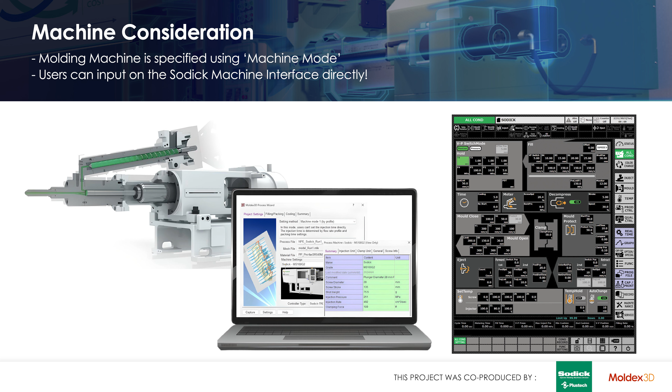Moldex 3D's machine mode allows for selection of a Sodick V-line two-stage plunger, and the machine interface allows for input of the machine parameters directly into the simulation. This makes the correlation from simulation to reality a breeze and plays an important role in developing a digital twin for smart manufacturing.

The balance of flow through the part geometry is important, but for a multi-cavity system like this one, the similarity from cavity to cavity is even more important to ensure every part coming out of the mold is up to quality standards and to decrease plastic waste.

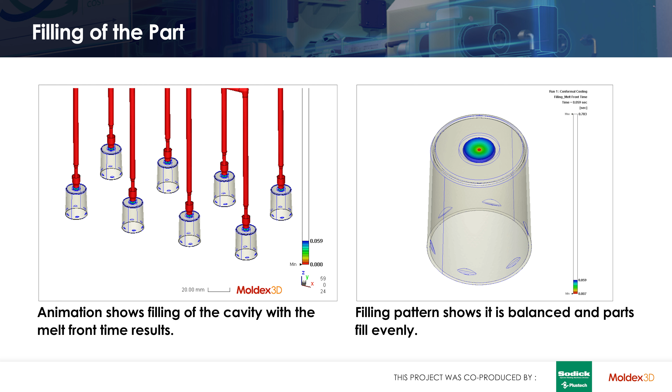To visualize the root cause of potential cavity-to-cavity imbalance, Moldex 3D's true 3D solid mesh can capture any thermal imbalance in the runner created by the flow of plastic. This can be done for both hot manifold systems as well as complex cold runner layouts.

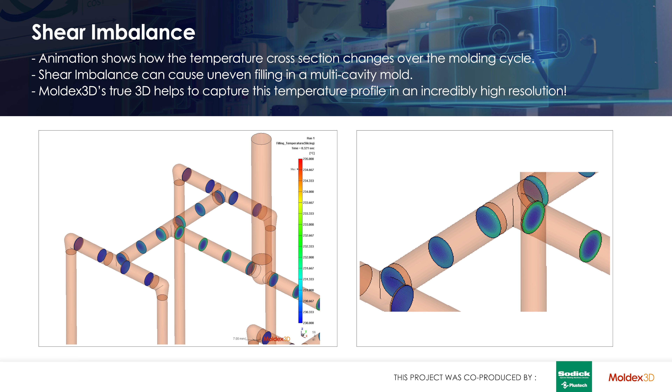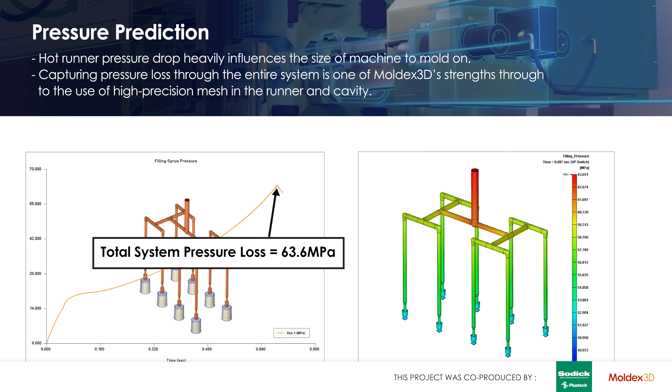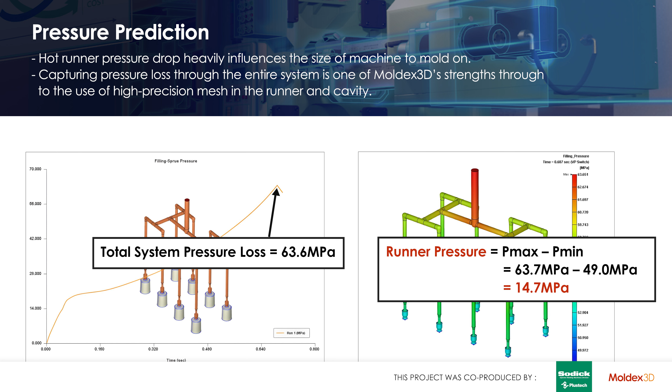The pressure loss through the system dictates how large of a machine is needed, so therefore having an accurate depiction of pressure drop through the cavities and runner system is imperative to anticipating the cost of production. Moldex 3D can model complex geometries and can separate the pressures in the parts and runner geometry.

The thermal distribution doesn't stop at the melt system, though. Moldex 3D uses 3D solid mesh for all components of the mold, including the mold geometry itself, enabling a cycle-wise thermal profile animation to see how the mold temperature is cycling over the duration of the molding time. Cycle time estimation and the cost evaluation of a complex cooling system can easily be run in Moldex 3D's true 3D analysis.